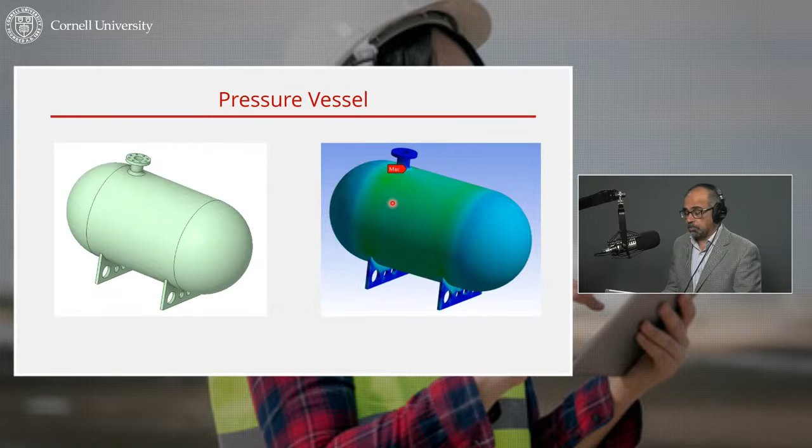Then you solve the mathematical model. This is based on elasticity, which I'll talk about more—3D elasticity—and you can get the stress distribution. This is the von Mises stress, and that tells you the maximum von Mises stress is going to appear over here, which means that the place where the nozzle is attached to the main body of the pressure vessel is probably where it's going to fail. You can also extend this analysis to include the effect of a shock load that might come due to, say, an earthquake. So that gives you an example from a pressure vessel.

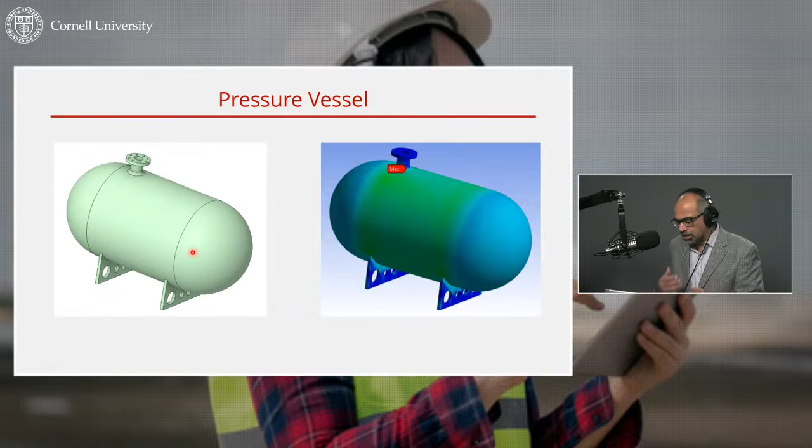By the way, that example is from my certificate program, for those of you who might be interested in learning more. This is the Finite Element Analysis Certificate Program, which is 5 courses, and elasticity applications is based on that particular example. So you see the science, the math and the physics, as well as how you apply it in ANSYS to solve this very practical problem.

Another example is the wind turbine blade, which I alluded to earlier. This is a thin wall structure, modeled using shell theory, which I get into in the 4th course, beam and shell applications, within that finite element certificate program. Again, here we simplify the geometry relative to the detailed CAD—we have the skin and 2 spars.

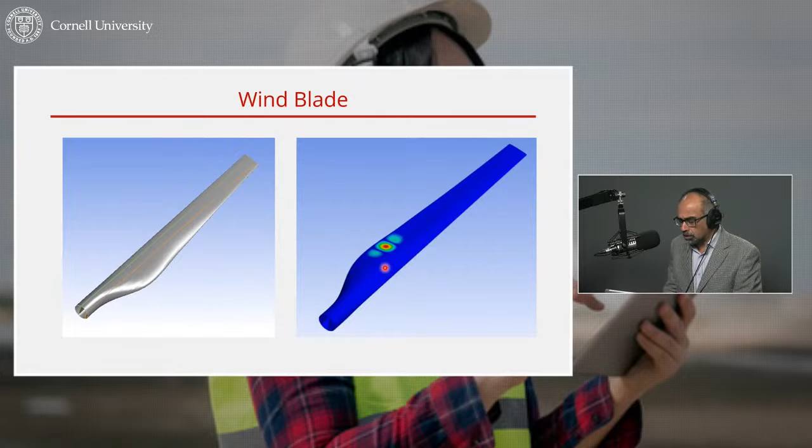Then you do the buckling analysis in ANSYS. First, you do a static structural, and then based on that, you can do an eigenvalue buckling. I get into the underlying science within that course in the certificate program, and that simulation tells me this blade is likely to buckle in this area, and it'll also give me the load at which that buckling is going to happen. So it'll show where I might want to make the skin a little bit thicker in order to prevent that buckling, depending on the load at which it buckles. Again, the details are within the course.

Here's another example, which again came through the collaboration between Cornell and ANSYS. This is a turbine disk, say in gas turbines. Again, the geometry is simplified—usually you'll have holes drilled in here and so on, but we ignore that, that's not important for the analysis. Then you have the blades, spinning at say 12,000 RPM, so analysis of the vibration, particularly natural frequencies at which you might get resonance, is very important.

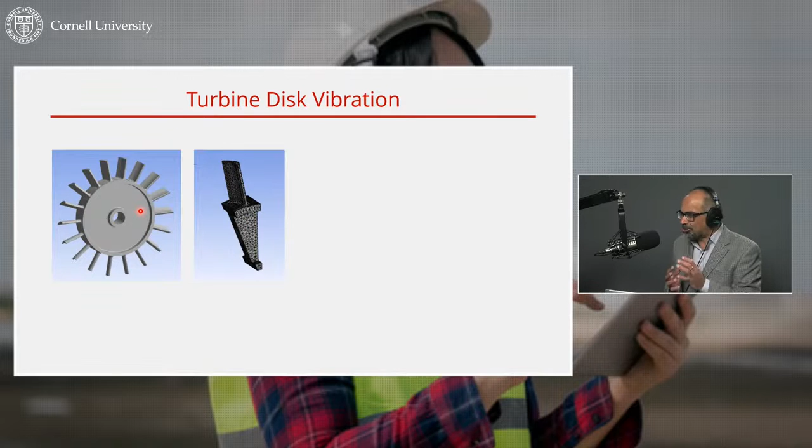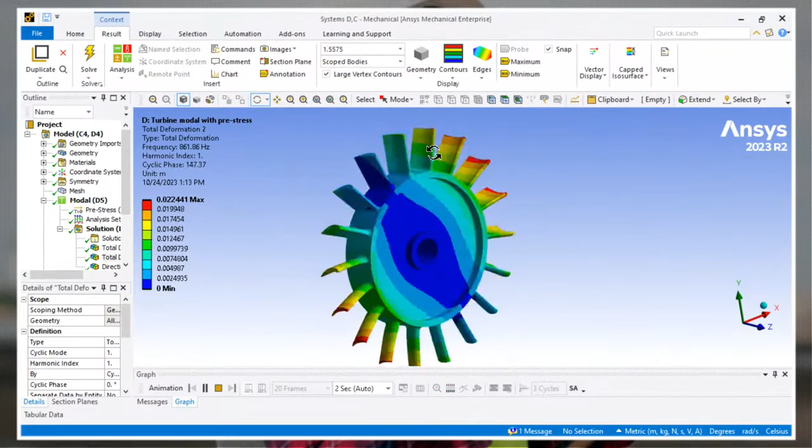Here, a trick is that you can use periodicity to model just one blade. Think about taking just one blade and modeling it, then using periodic boundary conditions. This is shown in the last course within that certificate, vibration applications. It shows you the mesh, which I'll talk about in a bit. So here again, you're using clever tricks to simplify the model, which means it'll run very quickly, and you can get the vibration modes and natural frequencies. If I go to ANSYS and show you this animation, even though you're modeling only one blade, you can get these traveling waves, and through a phase shift, you can model this out of plane vibration.

So that's another one, actually from dynamics - a very exciting application. And then there are also, you can basically do any kinds of physics. I work with solid mechanics. My own background is in fluid dynamics.

This is a 3D turbulent flow simulation past a car body, called the Ahmed car body. I picked this because there's a lot of experimental data against which one can validate one's simulations. So the color shows the pressure on that car body. This is a wind tunnel model, so instead of wheels you have these supports. And the arrows show you the direction of the flow.

This is from the other certificate program that you mentioned, Nick - the fluid dynamics simulations using ANSYS. This is covered in the 3D turbulent flow course, built around that particular application. The mathematical model is actually very complex, but one can understand it conceptually, and that's what you need. In my own teaching, I use the eCornell material, the videos and the assessments, in my own teaching at Cornell.

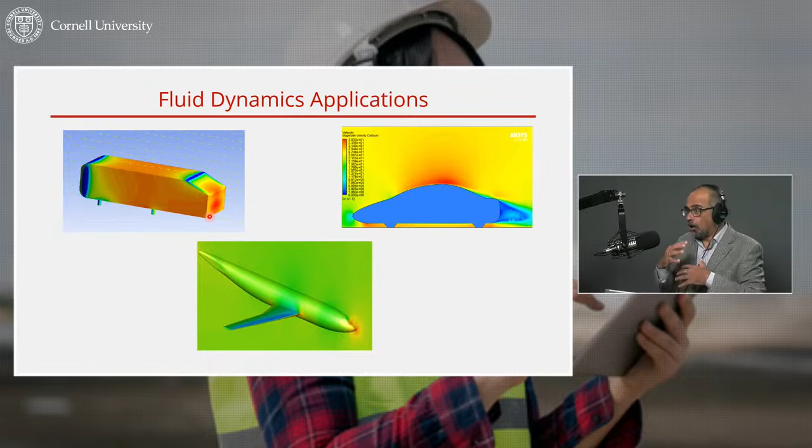The whole idea is you keep building the complexity of the model incrementally. Otherwise you'll get floored by the complexity of the mathematical model. But that's consistent with how human beings learn, because new ideas are built on existing ideas in the brain - it's a very hierarchical organization of ideas. So the way I build these ideas is I build the simpler ideas first, and I explicitly build the more complex ideas on top of that.

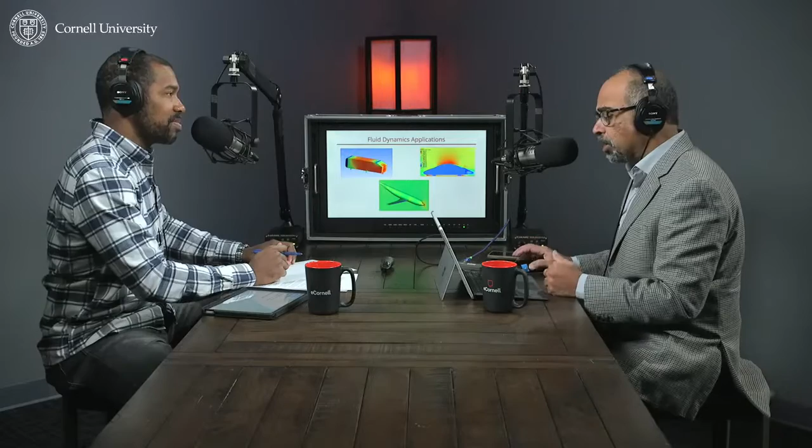So that gives you a sense of some exciting applications. And by the way, what you're trying to predict here is like the forces - the drag coefficient, the lift coefficient - and then you can tweak your design. For instance, students, based on the drag coefficient and how much separation you get behind the car, start tweaking their design.

You mentioned a bit about the teaching and how powerful some of these programs are with these examples. How has the teaching evolved over the years with the implementation of some of these programs? Do students need to know the mathematics behind it before doing some of these simulations?

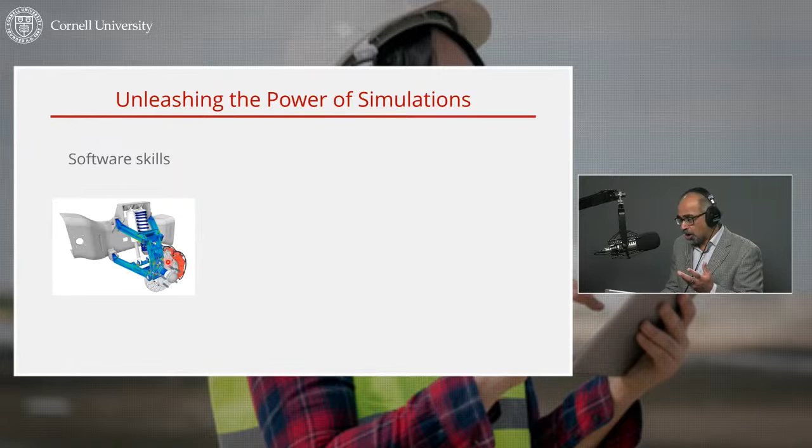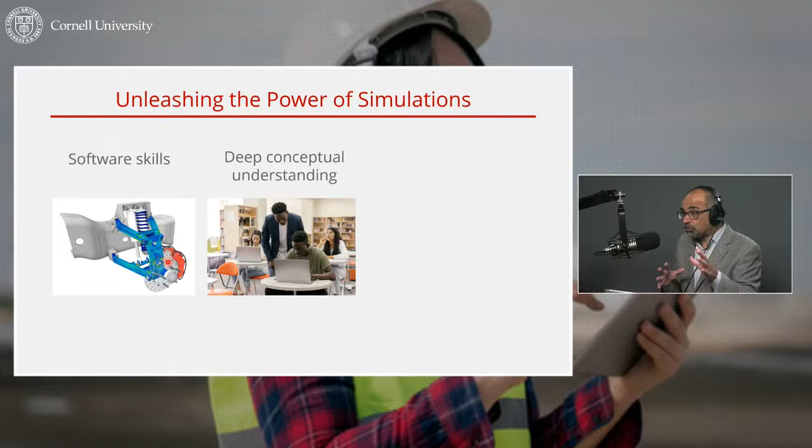That's the easier part. But you also need to have a deep conceptual understanding of the underlying science. And this is where what I've realized over the years is, as you alluded to, if math is not your thing, that's fine - because you need to understand the big ideas behind the science. And here I like to invoke Albert Einstein, who you might have heard of.

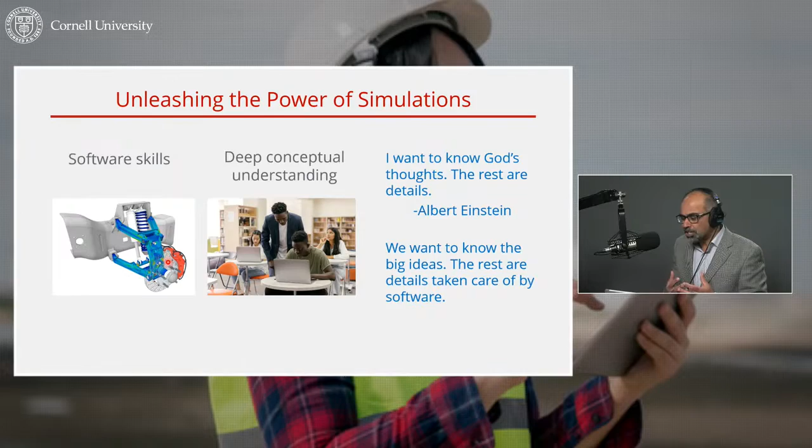There's a famous quote that says, "I want to know God's thoughts, the rest are details." Within the context of simulation, I would restate this as: we want to know the big ideas, and the rest are details taken care of by the software.

This is not how we usually teach, because we teach a lot of the details for very simple problems, and we don't teach the connection to what you're doing in the software. So I've distilled out the big ideas, helping you understand the science at a conceptual level, but also showing the connection to how you draw on those big ideas as you work through examples. This, I got from the ANSYS CEO: what you're doing in the process is combining the art of design with the science of simulation. That's when you can really unleash the power of simulations to design your product.

To expand on that idea - people usually call it the black box, right? A sophisticated simulation tool is a black box. So I have this 'what's inside the black box' framework, which might be familiar to some in the audience, because it's also part of my free edX course.

You were asking me before the event started about what courses I'm teaching this semester, and I told you I work across different courses - about 20 different courses, because I'm supporting simulation in these courses. And going into all these different courses, it felt like I was giving a different story each time. This was maybe 10, 15 years back. And I thought, we're using the same tool, there must be a way to frame simulation in a uniform way.

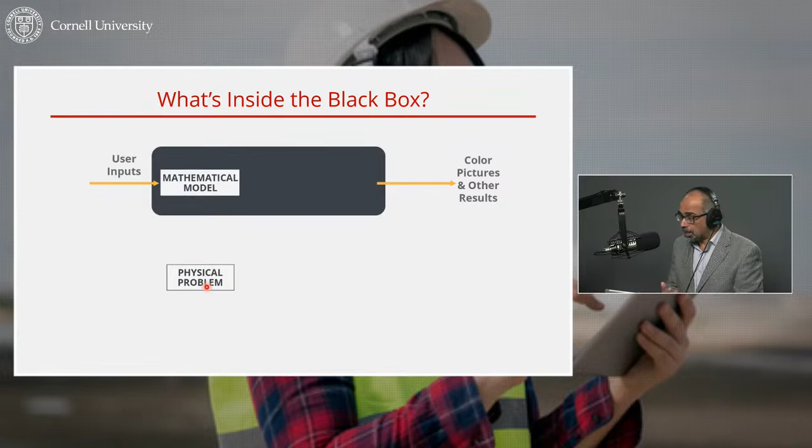You need to realize that the software is not solving a physical problem, say the pressure vessel - it's solving a mathematical model of that physical problem, built on some physical principles and assumptions. So the most fundamental thing you want to know about the science is: what is a mathematical model, and what physical principles and assumptions are used to build that mathematical model?

Then you can input that mathematical model into the tool. It hides a lot of the math, so I make as much of the math apparent as you need to know to make sense of what you do in the software. It'll get you an approximate numerical solution, giving you the primary unknowns at selected points - not everything everywhere. What it gives you directly are your primary unknowns at selected points, which you mark out through the mesh.

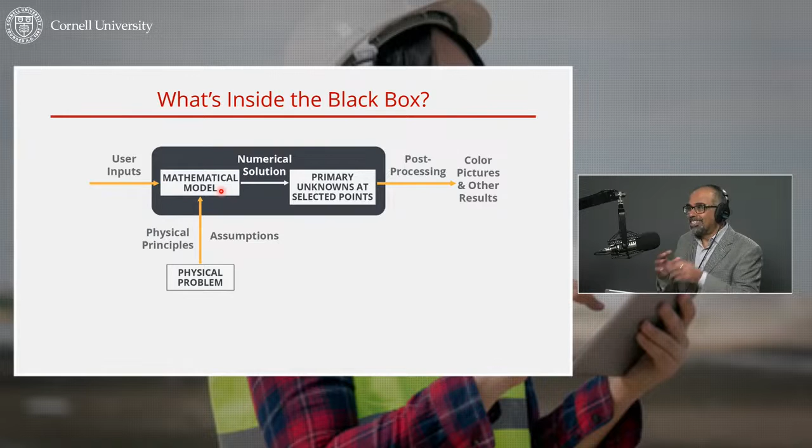Everything else is post-processing. So when you're in the software, you need to know: did I affect post-processing? Did I affect how the mathematical model is being solved? Or did I affect the mathematical model? One of the most common misconceptions I see in students is confusion between the mathematical model and how it's being solved - these are two separate things. Separating those out in your mind is actually very helpful to make sense of what you're doing in the software.

You also need to be able to do some hand calculations - I use this broadly, like back-of-the-envelope type calculations, and I show these in the course. Why is it so difficult for students to make that connection? Because the math is very complex, and partly that goes to how we teach. I think simulation is a disruptive technology in the learning space.

Because it's automating a lot of the math, you need to know the big ideas, but that's not how we have traditionally taught. So you have to really fundamentally rethink how you teach with this disruptive technology. My approach is a little unusual in that I've embraced simulation completely, because it's a powerful tool, you can think of it as a very fancy calculator. You need to know, to use that analogy, what is addition, multiplication, division. But if you want to divide two large numbers, you just use the calculator, and you can check your result by saying approximately I expect it to be in this range.

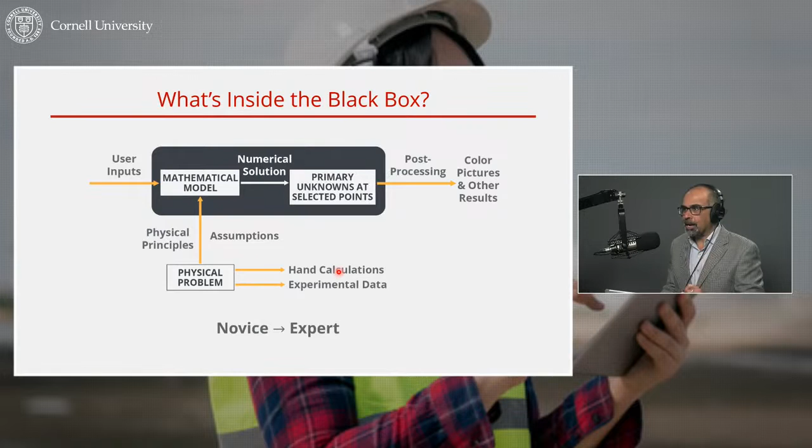The nice thing about having a framework like this is verification and validation, which is how you build confidence in your results, comes out of it. So going back to the framework - verification and validation have separate meanings, which people use interchangeably all the time, and it drives me nuts. Verification is: did I solve the model right? Whatever mathematical model I picked, do I have a reasonably accurate solution to that? That depends on your particular application. For instance, a numerical solution introduces numerical errors, and you want to make sure those errors are acceptable.

Validation is looking at whatever mathematical model I picked - is that a reasonable representation of the physical problem? That is, did I solve the right model? That is much harder to answer, and this is where experimental data comes in. So when you're comparing your simulation results to tests, you're checking that the mathematical model is a reasonable representation of the physical problem.

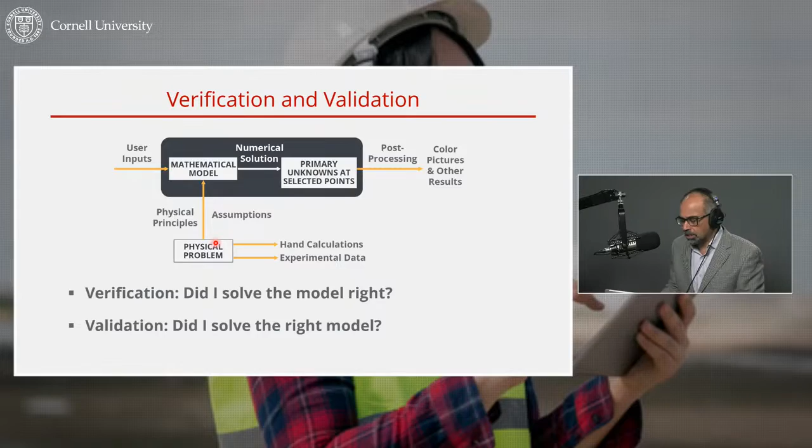That's one of the nice things about this framework - it points to all the things you need to do to build confidence in your results. So all the simulations in the certificate, for instance, and in my teaching, end with verification and validation, where you're doing a formal assessment of how good your results are, going back to this framework.

Yeah, so then what I was going to talk about is what are the conceptual foundations of finite element analysis you need to know in order to use a finite element analysis tool effectively. Shall I get into that? Yes, please.

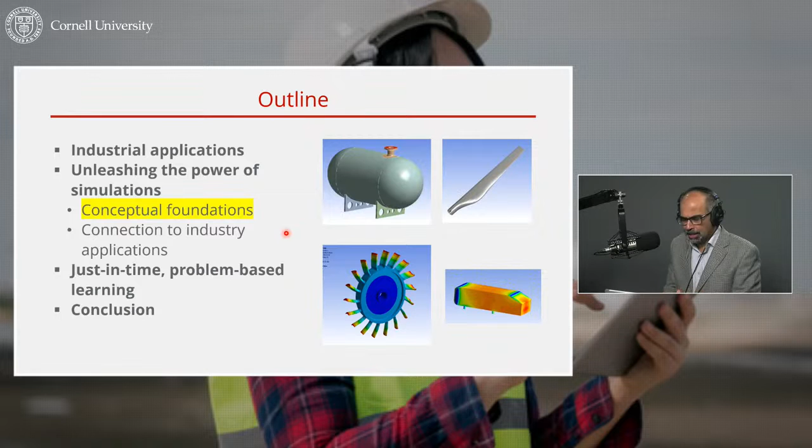So you want to know the conceptual foundations of finite element analysis, and the way I teach it - I've had students tell me, I've sat with a book on finite element analysis and I was completely floored. Whereas here, this is the kind of introduction I was looking for, where it pointed to the important concepts in a way where I was able to understand it and apply it in the software. In fact, I came up with this because I was floored by all the things in the textbook. My own background is in fluid dynamics, and after I started this job, I was trying to understand finite element analysis, and I was like, it cannot be this hard.

So what I did was take a simple example, like the one I have over here - this is from the certificate - and worked through it. All the big conceptual ideas, which I'll allude to in the next few minutes, came out of that. Then once you understand it in the context of the simple example, when you go to something like the pressure vessel, you can just use those ideas, because the details get much more complicated, but the ideas are the same.

This stuff, conceptual foundations of finite element analysis, if you go to the finite element certificate program, it's covered in this course, conceptual foundations, and ANSYS Mechanical concepts. So this is the foundations, and the second course is how you connect that to what you do in the tool.

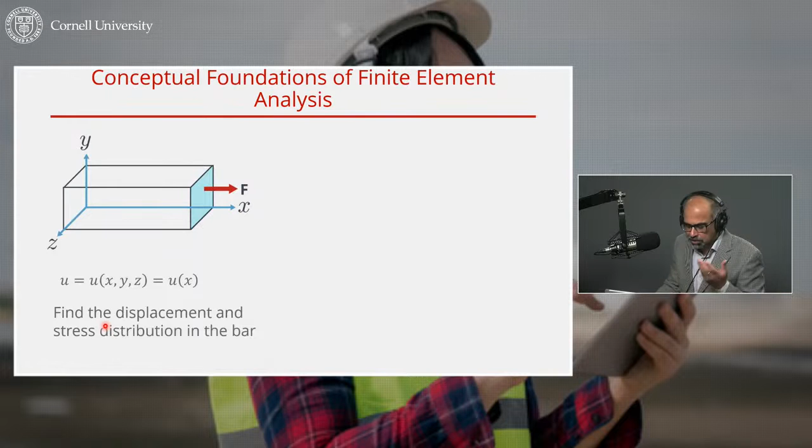Now, to simplify the details, you say every point on a plane like this is going to move by the same amount to the right. So I need to find only the displacement at one point, so you're reducing it to a 1D problem. And so you want to find the displacement and the stresses, and the factor of safety comes from the stresses.

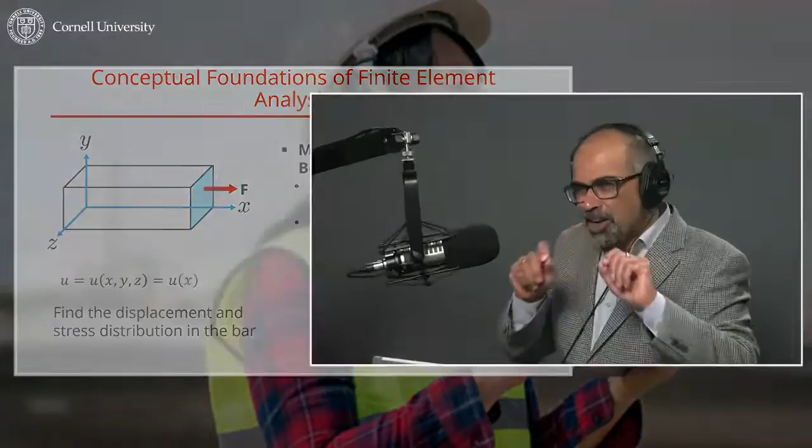So what is a mathematical model? The mathematical model is a boundary value problem. It's governing equations defined in a domain, boundary conditions defined at the edges of the domain. This is something that is taught in differential equations courses, but for very simple problems. So it's the same idea, but it becomes much more complex.

So how do you derive the governing equation for this? You go to Newton's second law. F equal to ma, and there's no acceleration, so it's just a balance of forces, which is a free body diagram. So the physical principle is Newton's second law, but what is it applied to? As soon as they tell me the fundamental law is Newton's second law, I say, what are you applying it to? Because that is also important.

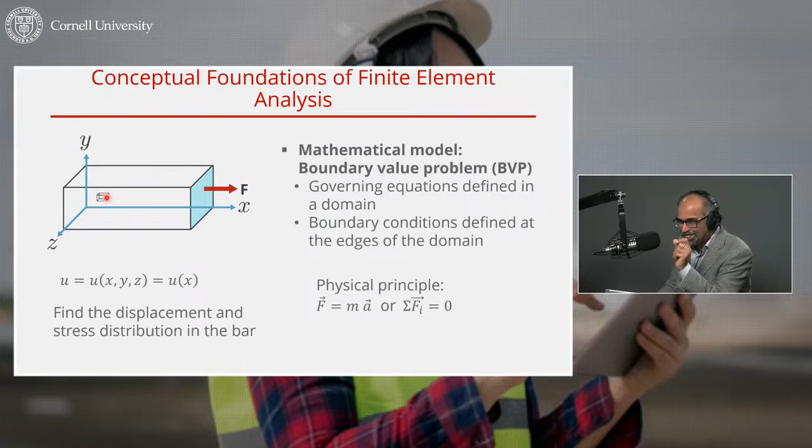What you're applying it to is what's called an infinitesimal element, a vanishingly small chunk of material. That's a trick in calculus. Everything becomes vanishingly small, but they cannot be zero. So you're at the limit of it becoming vanishingly small, but not zero. That's what the limit idea is. And if you do that, you will get the governing equation, which is a second order differential equation.

And this is the body force on it, like gravity. In fact, you also need to use Hooke's law. But Newton's law is the most fundamental law that you use. And then you have boundary conditions. So you say at the left end, it's fixed, so you'll say u equal to 0. At the right end, you're applying a force, and you can show that actually sets up the slope.

So again, the simple example shows you the two big types of boundary conditions: it's either displacement or the slope of the displacement. And wherever you apply a force on the model, you're specifying the slope of the displacement.

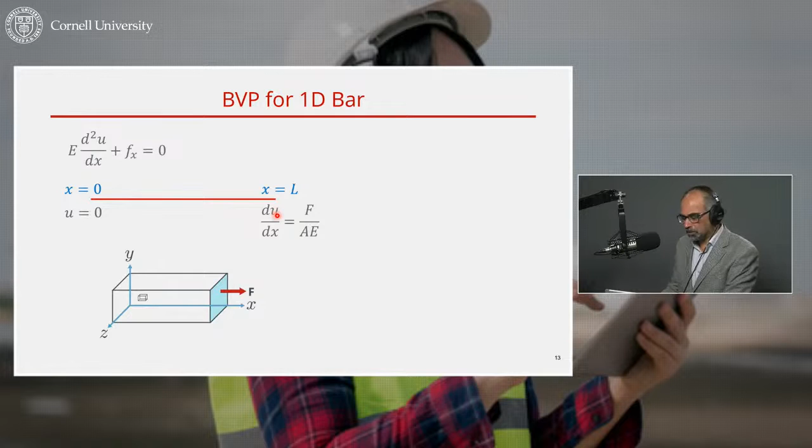And in deriving this, you have to make assumptions. So this is key, and this goes back to the question from the audience: how do you convince your manager? And that's where basically you can make reasonable assumptions and build a mathematical model.

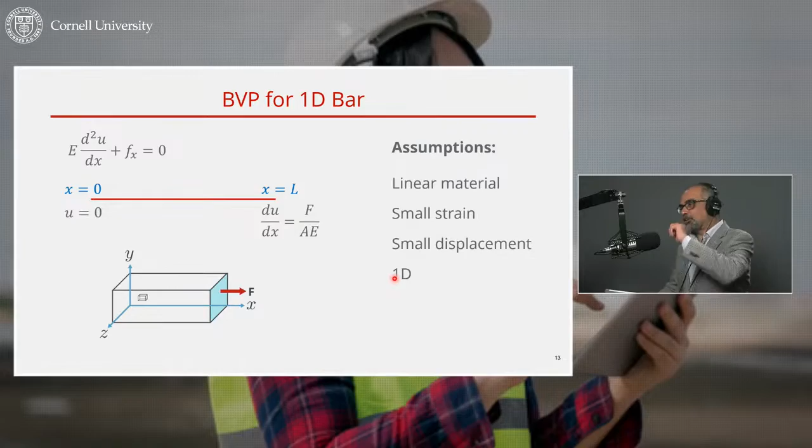And so these assumptions come out of this simple 1D example, and here also you assume 1D. So when you go to the pressure vessel example, for instance, which is what I do in the certificate program, these assumptions still are valid. The only one we relax is now instead of 1D, it's 3D. Everything can vary in 3D, so you see the governing equations. And so that gives you a sense of what is a mathematical model.

Finite element is not a way to build a mathematical model, it's a way to solve the mathematical model. So let me talk about how do you solve that numerically using the finite element method, and what are the primary unknowns at selected points. So I'm moving from talking about the mathematical model to talking about how do you solve it using the finite element method.

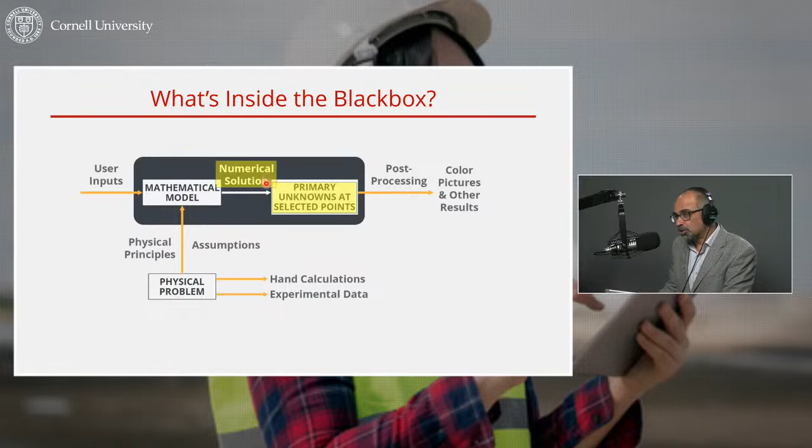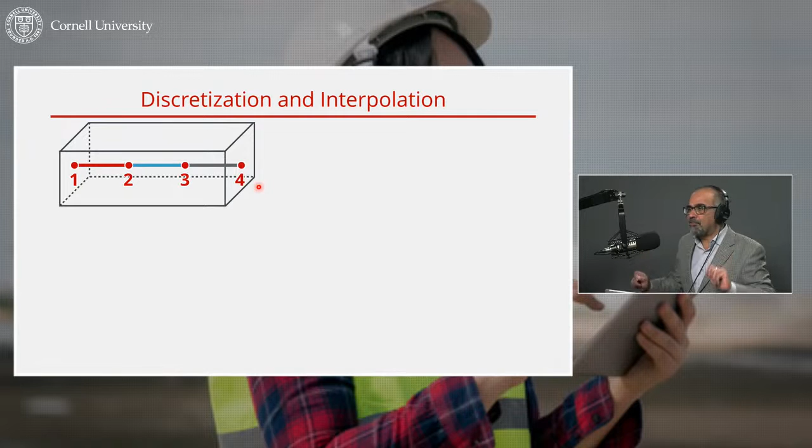So two big ideas, discretization and interpolation, that come on this one slide. You say it's very hard to find the displacement everywhere, so what I'll do is I'll find it at selected points. Here, as a simple example, I will find it at 4 points, and these are called the nodes. So you reduce the problem to determining U values at selected points.

So what if you want to know, say, the value here? You just use an interpolation between those two values, and that looks like that. So that's just, you have a linear variation between the nodes.

Now, if you're doing a finite element course, at this point you would do a deep dive into what are called shape functions, which some in the audience might have seen. What I've realized is when I'm in ANSYS, I never have to think about shape functions because all that is automated. But what I have to think about, what I need to know, there is an interpolation, and I need to know the order of the interpolation. I never get into shape functions in this particular certificate because that's a feature that's automated.

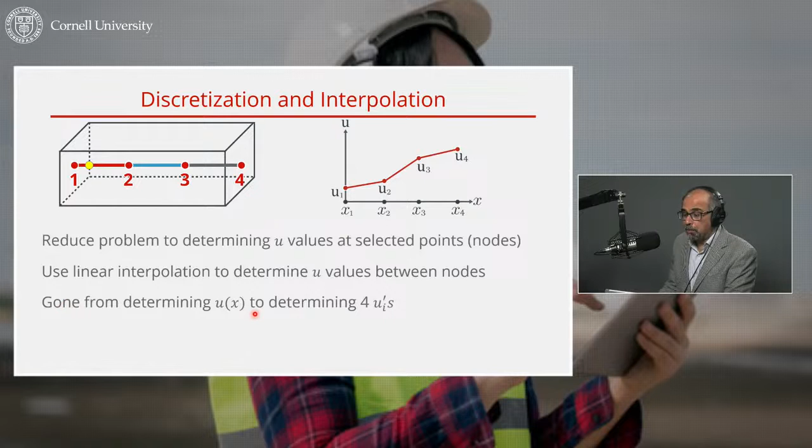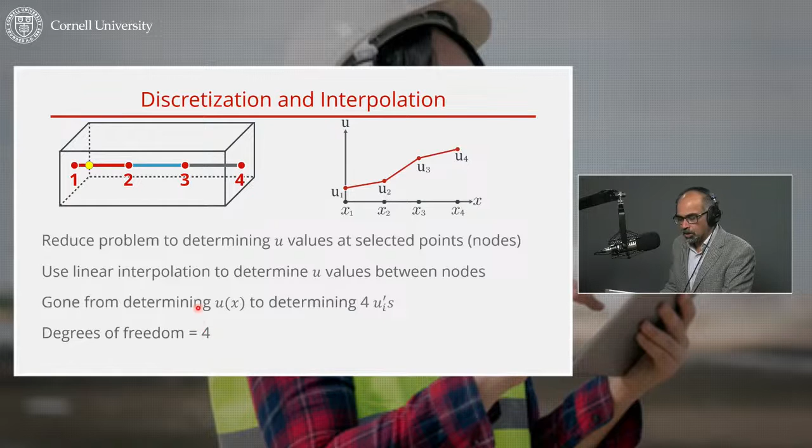So this is a big idea, the discretization. You've gone from determining U everywhere to determining it at 4 values. In a real model, it'll be thousands or even millions of points, but the same idea. You'd say the degrees of freedom in my finite element model is 4. So how do I find those 4 values?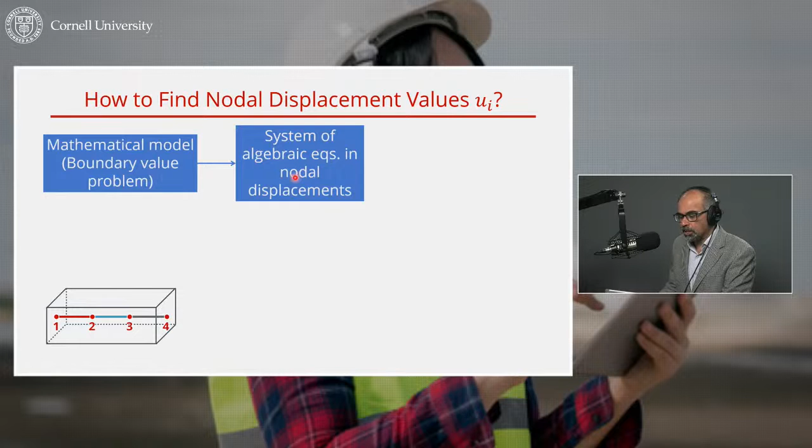The big idea is that you take your differential equations with boundary conditions, your boundary value problems, and derive algebraic equations, a system of algebraic equations. You'll derive 4 algebraic equations. For that, you have to use the polynomial interpolation I was talking about, the element by element polynomial interpolation for U.

This is a very complicated step the way it's usually presented. But when you do it in the context of a simple example, like I do in the certificate, it becomes tractable. You go to this integral form called the weak form, and then you substitute your element by element polynomial interpolation, and out will pop the algebraic equations. The nice thing is you see what errors are introduced in the process, and how you minimize those errors.

So that's my interpolation. And then, solvers these days, computers these days, you throw like a million algebraic equations at them, and they'll solve it for you. You get those 4 values, and then everything else is post-processing, because through the interpolation you can get the displacement everywhere and so on. So that gives you the big ideas.

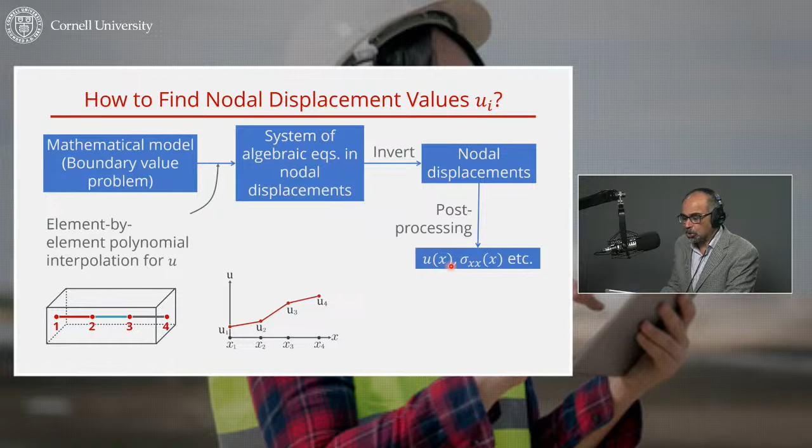From this, in the certificate, we actually go through deriving the algebraic equations and solving them. You get these 4 values, and you can compare it to the exact solution. For the simple problem, you have that, and you see it matches very well. The solid line is the finite element solution.

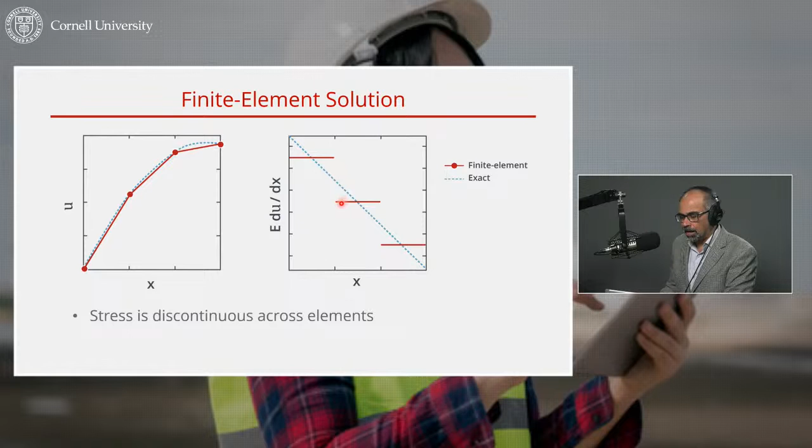Now, when you want the stresses, you have to take the derivative. Here the stress varies linearly, that's this line, whereas my finite element solution says the stress is constant. So you see there is this error in the solution, and 2 big ideas jump out of the simple example that apply to more complicated problems. One is that the stress is discontinuous across elements because the slope is discontinuous, but the error in stress is much greater than the error in displacement.

In ANSYS, for instance, I see students, the only thing they'll look at in the results is the stress. And I'll say, first of all, you don't have an intuitive feeling for what the stress is, plus it has a lot more error than the displacement. So look at the displacement. You've applied the pressure on the pressure vessel. How is it going to, is it expanding? Do some sanity checks.

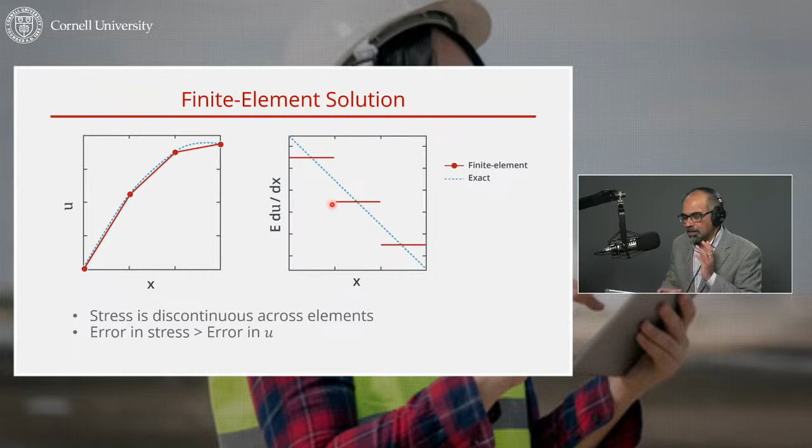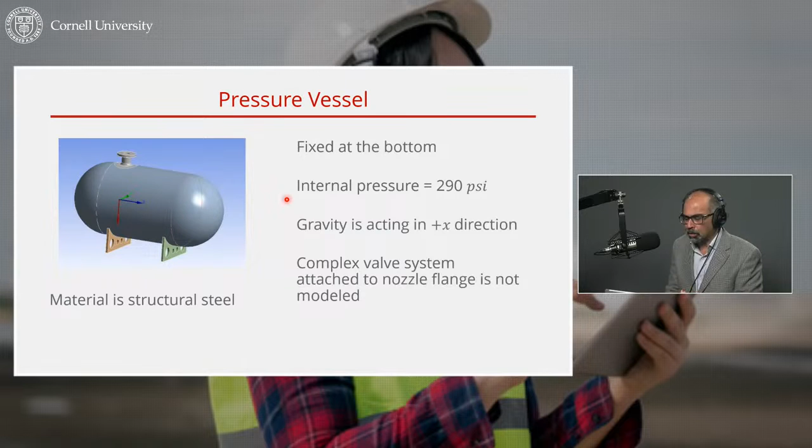Through the simple example you get to the big ideas, and it also gets into how you reduce numerical error, which I will skip in the interest of time. But the important thing is you draw upon this when you get into the pressure vessel. So to understand the science behind the pressure vessel simulation, now you go back to these ideas, and maybe at this point I can briefly allude to that.

For instance, the governing equations, right? This is where, when you get into the 3D - so this is the 1D case, this is the one I showed you, and there's a whole chain of reasoning used to derive it. The corresponding equations in 3D are this.

So when you see something like this, it's kind of overwhelming if math is not your thing, which for a lot of people it is not. But you can still be a great engineer because we have these tools. In fact, when I talk to people in industry, most of them have forgotten all their math, but they're using CAD and simulation tools all the time because the math is automated by these tools. Essentially the strategy is: you understand the 1D, and you understand the math in 3D, much more complicated, by analogy to the 1D. So again, it goes back to the idea that new concepts and new ideas in your brain are built on old ideas.

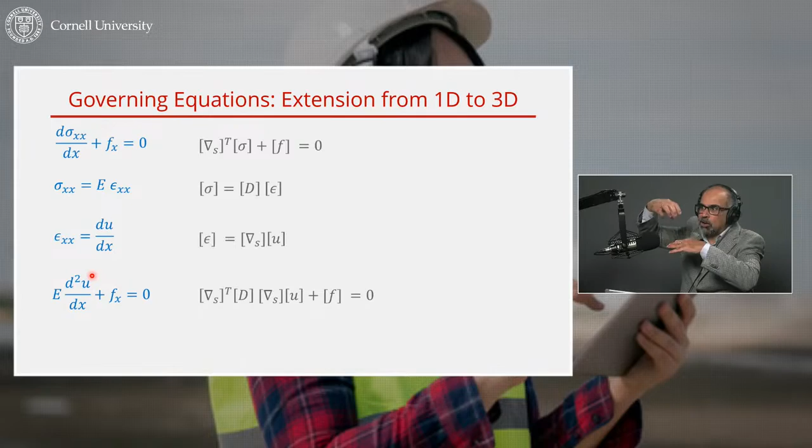If you have a strong understanding of the 1D, you can understand the 3D by anchoring this much more complicated 3D idea in the 1D. This is not how we usually teach. By using these analogies and not getting into the details, because the details are taken care of by the software, you can really get a good conceptual understanding of the governing equation of 3D elasticity. I won't get into the details here.

So you understand the mathematical model by analogy to 1D, and again, the assumptions are the same as in 1D that I alluded to. Very important for the engineer to know what assumptions are built into the mathematical model, because your results are only as good as your mathematical model.

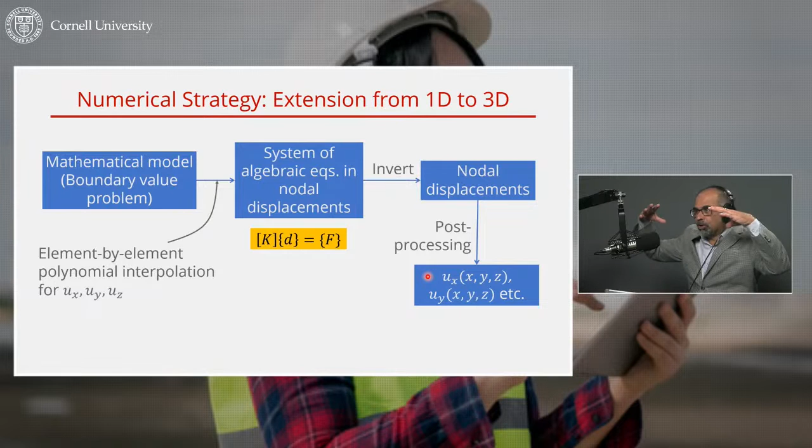But the strategy used by ANSYS to solve it is the same as for 1D. That's why I go back to this particular slide, to say the details get much more complex, but the overall strategy is the same. That's what you need to know as the user.

The other thing you need to be able to do is make some hand calculations. This is where I tell students, talk to experienced engineers. They will tell you what kind of expected results they get. For instance, I'll show you an example for the pressure vessel. This actually, an ANSYS engineer showed me. It's a very cool trick.

First of all, there are multiple things you can say about the results. For instance, here the geometry is symmetric. We've simplified the geometry to be symmetric about an axis. If you cut it like over here, it's symmetric - this half and that half would be symmetric. So we expect the displacement and stress contours to be symmetric.

But the reaction - I'm holding it here - I can actually predict what that reaction should be based on a simple hand calculation. The idea is, say if I have a closed box with just an opening, that corresponds to this opening here. So this force over here is not balanced by the force over here. Whereas in this region, where I've not highlighted it, the force due to this pressure is balanced by that. So the imbalance is just the pressure times this area.

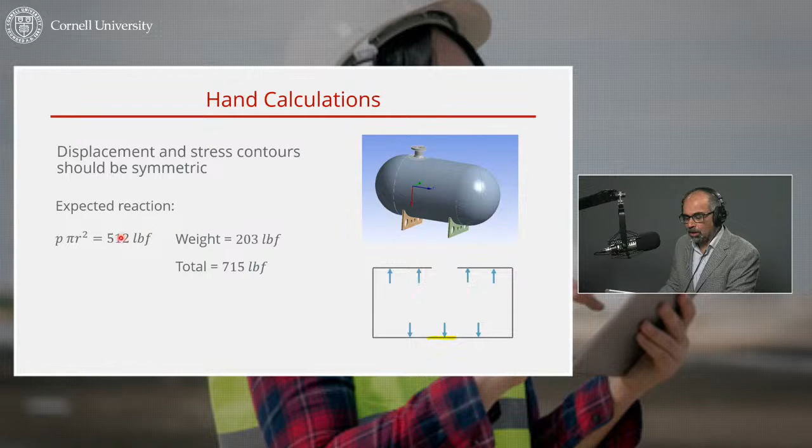And you can do that for that area. You can say it has to be 500, and then that imbalance load due to this opening is 512 pound force. You also have the weight, and the total reaction should be a combination of that. So you can check that.

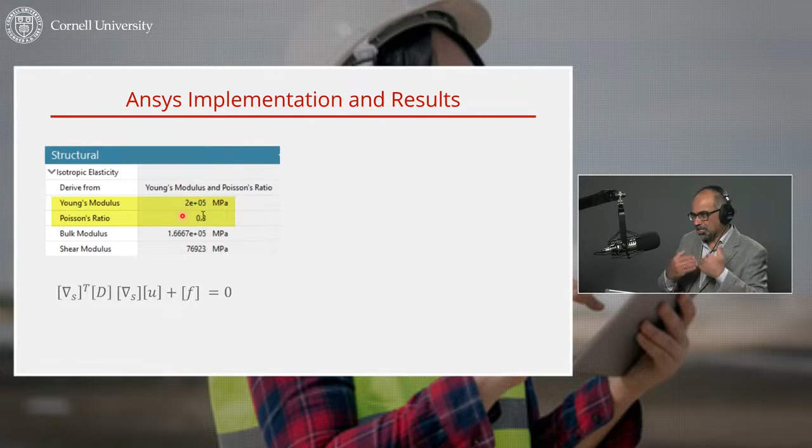So in ANSYS, when you implement it, you have to input the Young's modulus. And to make sense of that, you go back to the governing equation and say, this is something that appears in D, the material properties. So the big thing is that you're connecting what you're doing in ANSYS to the underlying science. And then you look at the results - this is symmetric.

And for verification, you apply the load in 2 steps in ANSYS, and you see, boom, it matches. ANSYS is deriving the algebraic equation - it's doing a much more complicated thing - but this is a sanity check.

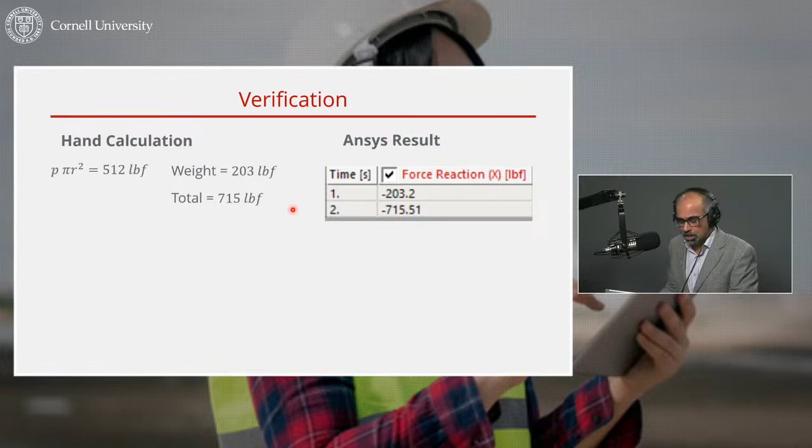So there are more examples like this within the certificate. For instance, if I go to that particular course, Elasticity, there are 2 sections: one is review the big ideas. So we go through and derive the governing equation, which I showed you by analogy to the 1D.

Each of these - this is active learning because you have the video and then you have a quiz. If I say resume quiz, so you're learning something in the video - it's about 8 minutes long, that's typically the length of the video. You saturated your short-term memory in that time, so you have the question to apply that knowledge.

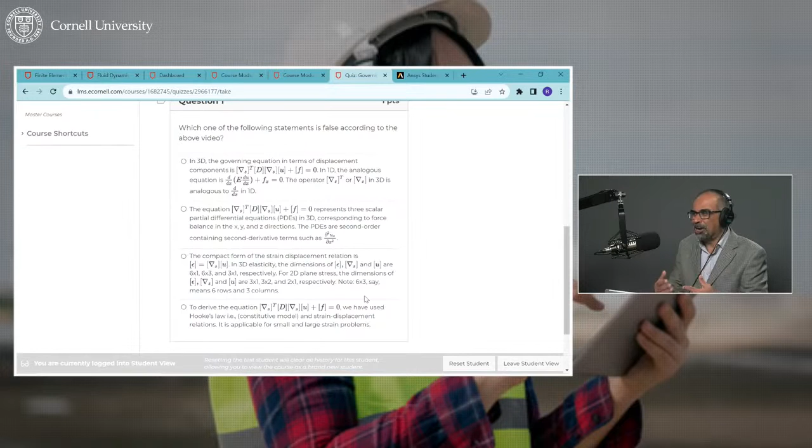And you can see it's a non-trivial question, so you have to really understand what's in the video. You often have to go back - students tell me they have to go back to the video to answer the question. I was like, mission accomplished.

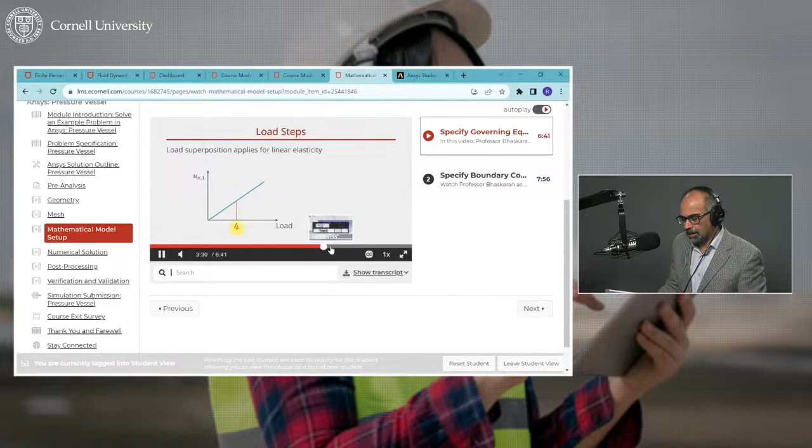But then you go to, when you're in ANSYS, I show you how you input the mathematical model into ANSYS. If I go to that particular step, this shows you how to do it in ANSYS. Here, you're looking at the video, that's me on camera first, and then you're looking at the governing equations, and then you're in ANSYS, specifying the governing equation, specifying boundary conditions.

So that gives the audience a sense of how the learning within the online platform is active. You're learning something, you're answering quiz questions, you are seeing something being done in ANSYS, you're following along in ANSYS.